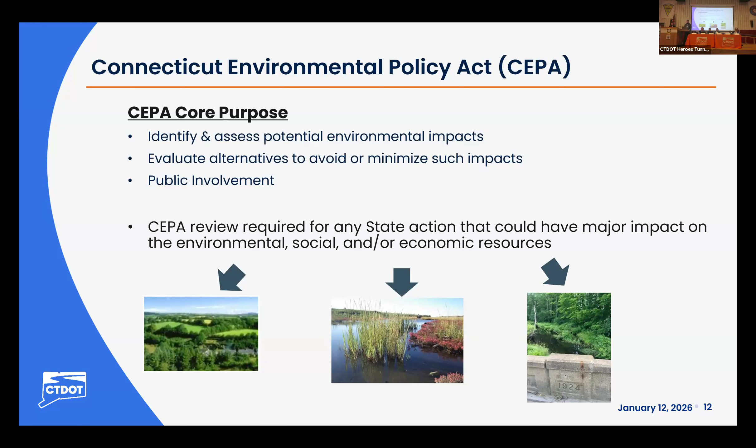Actually, for this project, because it involves federal funding through the Federal Highway Administration, we also have to ensure compliance with the National Environmental Policy Act, or NEPA, as well.

So that's obviously just a really brief general idea of what CEPA is and what resources we need to consider under CEPA. So I'll just describe what is meant by the term scoping. Under CEPA, scoping has a really specific definition, and the process involves a defined set of steps for public outreach. CEPA scoping is defined as the gathering and analysis of information that a state agency will use to establish the extent of environmental review of a proposed state action.

So basically, it's really a way for us to get information from the public and other state agencies, so we can determine the proper level of environmental review and documentation needed for a project. This allows us to make informed decisions that actually consider the environment. That process begins when we publish a notice of the project in what's called the Environmental Monitor, which kicks off a minimum 30-day public comment period.

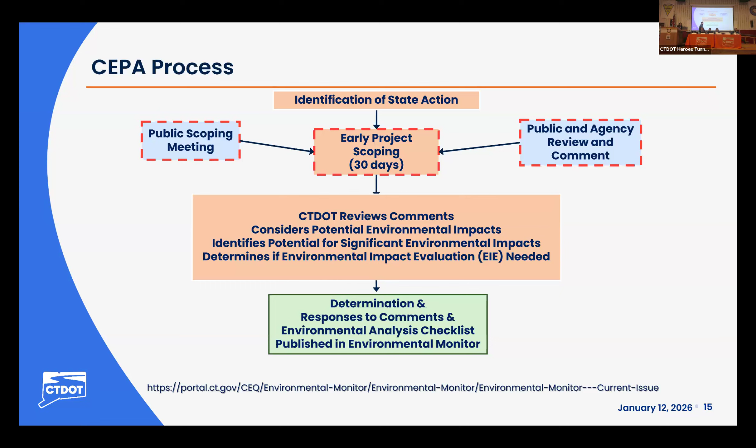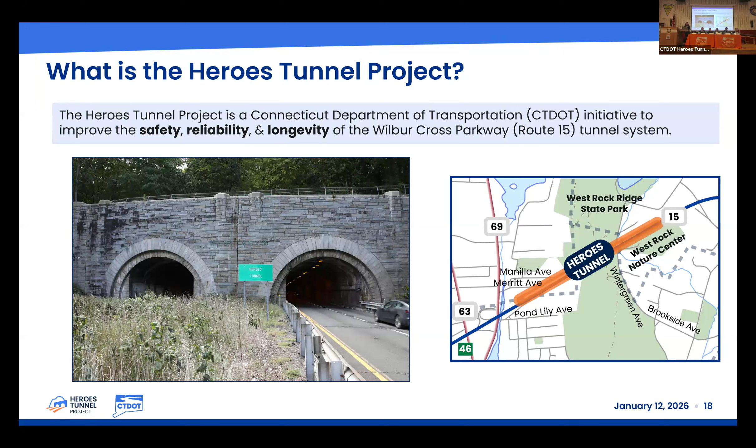The Heroes Tunnel project is a CTDOT initiative to improve the safety, reliability, and longevity of the Wilbur-Cross Parkway Route 15 tunnel system. At the last public information meetings held in 2021, we presented an option that would essentially replace the tunnels, creating two bigger barrels and adding a third barrel. However, there are many environmental resources in the park on top of the tunnel that would be significantly impacted by drilling to widen the tunnels and add a third barrel. So after the 2021 meetings, we went back and looked at rehabilitation and replacement options again, to ensure we were recommending an option that addresses the needs of the Wilbur-Cross Parkway tunnel system and maximizes safety while minimizing impacts to the traveling public and resources in the vicinity.

The purpose of the project is to correct existing deficiencies, including structural, highway, electrical, and mechanical elements, as well as traffic congestion, enhance safety, improve travel, and ease future maintenance of the Heroes Tunnel.

Some of the needs: the existing tunnel has extensive deterioration. There are annual inspections performed, and there's extensive cracking, loose or spalled concrete, and areas where reinforcement is exposed and corroding. Also, the ventilation system is non-functional, and the electrical system needs rehabilitation to ensure lights remain reliable and functional. With this deterioration, CTDOT's maintenance forces are frequently going out to the tunnel, removing and patching concrete, and doing other repairs. One goal of the project is to minimize the need for future maintenance and extend the service life of the tunnel another 25 years at a minimum.

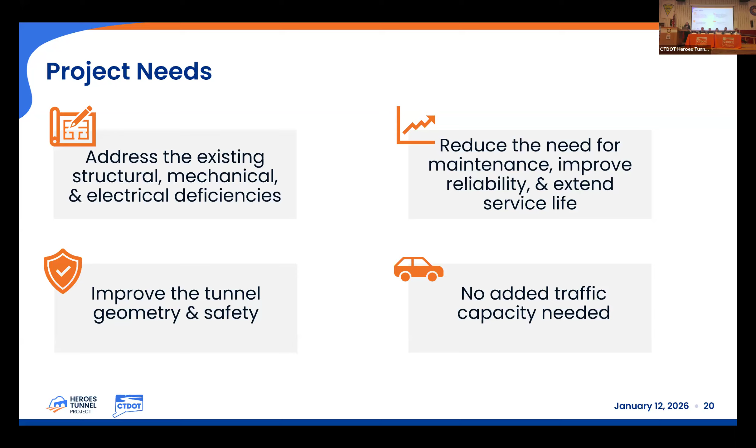So considering the purpose and the project needs, the proposed scope includes tunnel liner rehabilitation, to address the cracking, spalling, and loose concrete typically found in the tunnel, and to reduce the need for frequent maintenance repairs. In addition, we're proposing life safety and fire protection upgrades, which will address the non-functional ventilation system and ensure that emergency responders can get there and respond in a fire or other emergency.

Lastly, full replacement is not being pursued any further, so we're no longer looking at the option that added a third barrel. As you know, considering that there's no need for additional traffic capacity, and that the primary focus is to increase safety and address the deterioration, we're not pursuing that full replacement option.

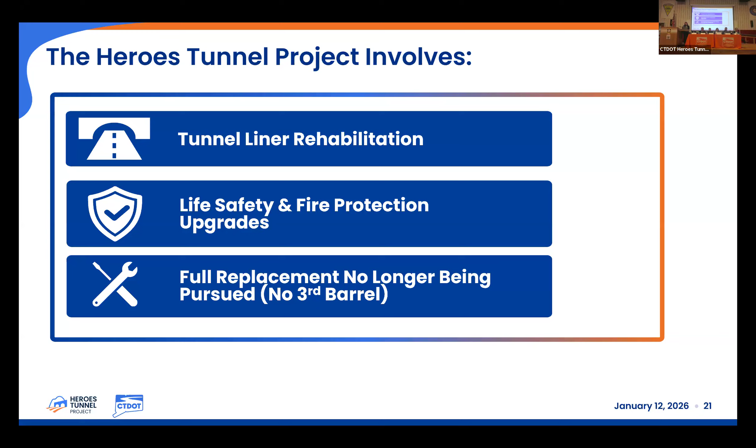The Heroes Tunnel carries Route 15 northbound and southbound under the West Rock Ridge State Park in New Haven, Woodbridge, and Hamden. The West Rock Ridge State Park is an important resource in Connecticut for both recreational and environmental reasons, so potential impacts to the park were carefully evaluated when considering tunnel rehabilitation alternatives. The recommendations proposed under this project were selected to minimize impacts as much as possible.

The limits of State Project 92-689, the Exit 46 interchange project, are located just south of the tunnel. We're working closely with that project team to coordinate construction activities and make sure there are no conflicts between the two projects.

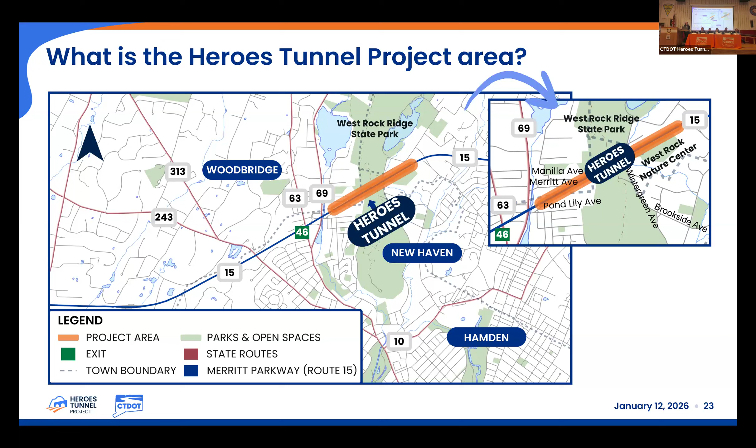As it stands today, the Heroes Tunnel conveys two 11.5-foot wide travel lanes and 28-inch wide walkways in both barrels. Inspections are performed annually, and the tunnel is considered to be in poor condition based on the condition of the tunnel liner. Approximately 74,000 vehicles drive through the tunnel each day, and in 2024 there were 30 accidents reported within the tunnel. Fortunately, none were fatal.

Highway geometry improvements within the tunnel and at the Exit 46 interchange are proposed to improve safety and reduce the number of accidents. The tunnel is approximately 1,200 feet long. Since it's over 1,000 feet long, we need to consider ventilation needs for both congested traffic and fire emergency scenarios, using the National Fire Protection Association, or NFPA 502 code, as a guide.

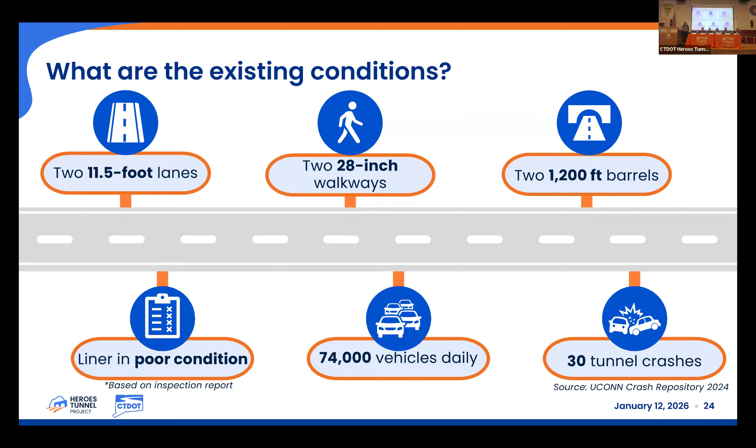Per NFPA 502, which has been adopted in the Connecticut State Fire Code for new tunnels and is being used on this project as a guide for the tunnel rehabilitation, an Authority Having Jurisdiction, or AHJ, should be designated for the tunnel. For this project, the AHJ is the State Fire Marshal, who is responsible for ensuring that all design, operation, and maintenance activities for the Heroes Tunnel comply with applicable codes, standards, safety regulations, and emergency response needs.

We've had several workshops over the past year with the State Fire Marshal and emergency responders in New Haven, Woodbridge, and Hamden, as well as state agencies, where they've shared their operational needs and provided feedback on the proposed fire protection and life safety improvements. We will continue to coordinate with them throughout the design phase to review the design plans and develop a post-construction emergency response plan.

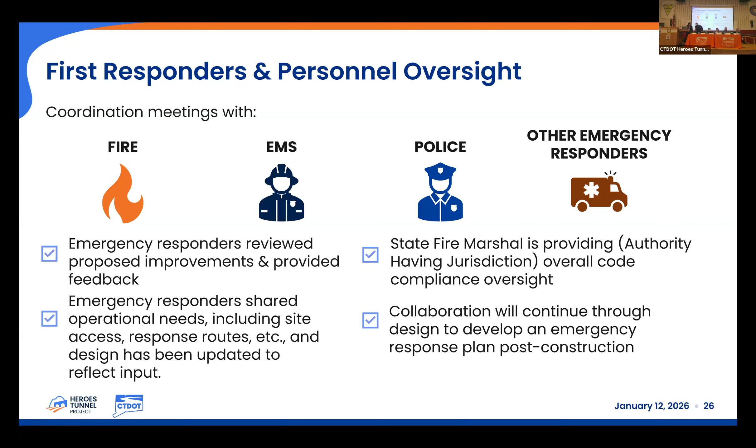Well, thank you, Tracy.

Recommendations. So what are we looking to do as far as the tunnel is concerned? Well, first off is our life safety and fire protection recommendations. These are all based on the National Fire Protection Association NFPA 502 requirements for ventilation, emergency detection systems, electrical systems, traffic control, and fire protection upgrades.

The recommended improvements include incident command post staging areas at the north and south approaches to the tunnel. This allows first responders to stage and evaluate responses to an incident within the tunnel. We'll also have new fire hydrants placed at those incident command staging areas, providing a water source for first responders.

We'll also be proposing a new fire detection system. What we're proposing is a fiber optic linear heat detection system verified by a monitored CCTV camera system, overseen by those operating the tunnel and overseeing tunnel operations.

Another thing we're proposing is radio frequency boosters. Those will boost the signals for both emergency radios and cell phones within the tunnel, so if there's an incident, you have your cell phone and can actually call 911.

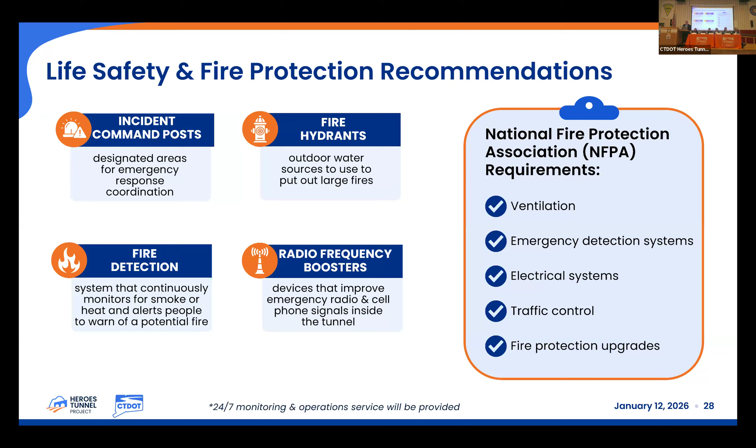Our ventilation requirements - again, as Tracy said, the presently existing ventilation no longer works within the tunnel. Ventilation fans will be provided for both emissions control, that's normal operation ventilation, and the dissipation of smoke during an incident, which is emergency operations ventilation.

Emission sensors will monitor the vehicle emissions, and the fire detection systems will monitor for fire and smoke during an incident. What we're proposing is 8 pairs of longitudinal jet fans per barrel, placed above the traffic envelope.

A little later in the slides, we'll show you a cross-section of what that actually looks like. Modifications are recommended to the tunnel liners at those support locations so we can modify the tunnels to be able to support those fans.

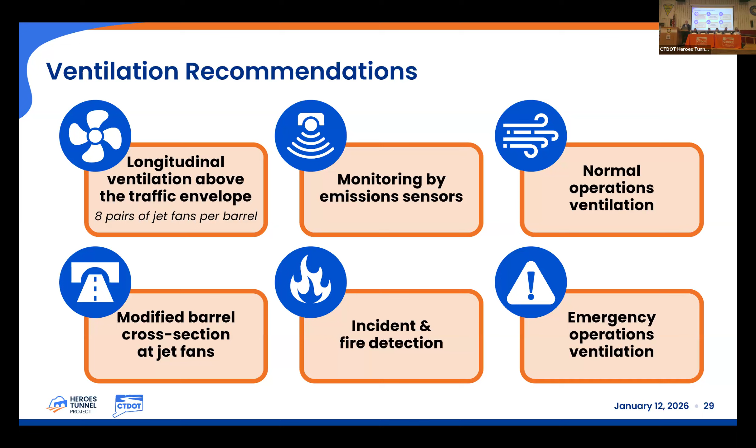For our traffic control recommendations, traffic control is required to improve safety and manage traffic flow during an incident. The proposed new traffic control systems include new portal traffic signals, which will be able to close the portals during an incident, shutting down both portals as needed.

We'll also be having lane control signals. Those will be able to close lanes during small or non-emergency incidents.

Dynamic signs or variable message signs, VMS signs, will also be utilized. That will notify traffic in advance of incidents, maintenance, construction, or inspection work happening within the tunnel. So you'll be notified in advance if there's an issue, an incident, or inspection or construction work going on.

We'll also have upstream warning signs. These will indicate that the traffic systems just described will be in play as you approach the tunnel, so basically, pay attention to them.

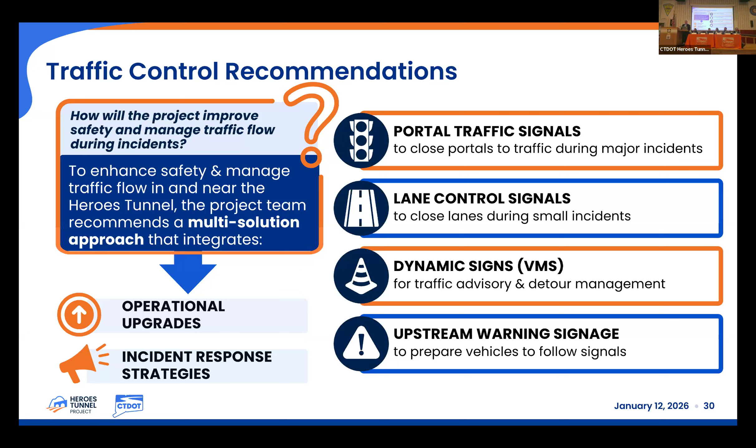One of the things we're looking at, and we have a board for the audience, is the crossovers. There are existing crossovers at both the north and south approaches in the median, used to divert traffic into a single barrel during inspection and maintenance operations. The existing geometry only handles a 15-mile-an-hour design speed because they're so tight, which slows traffic during these operations or during construction.

The proposal will increase the opening to allow a 40-mile-an-hour design speed, creating more efficient traffic flow, especially during construction. This will be critical for the construction phase, and their continued use post-construction will be evaluated as we move on in the design.

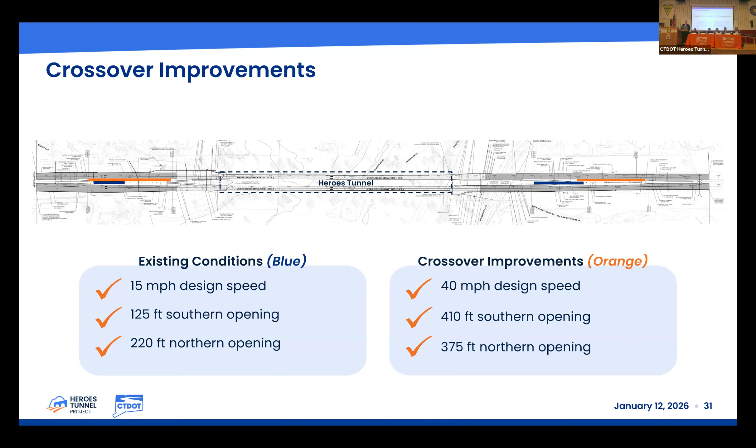For our maintenance protection of traffic during construction, construction will be limited to off-peak hours. We'll have 2 operational lanes during construction, within one tunnel, with bi-directional traffic in the barrel not being worked on, utilizing the improved crossovers for the higher 40-mile design speed at the approaches.

As far as off-peak hours, we're looking at nights from 10 p.m. to 6 a.m. We will note, though, as the design progresses, some daytime work may be required to complete more challenging construction tasks. We're monitoring the construction operations we're proposing, but if daytime work is needed, this will be coordinated with the required municipalities as we move forward.

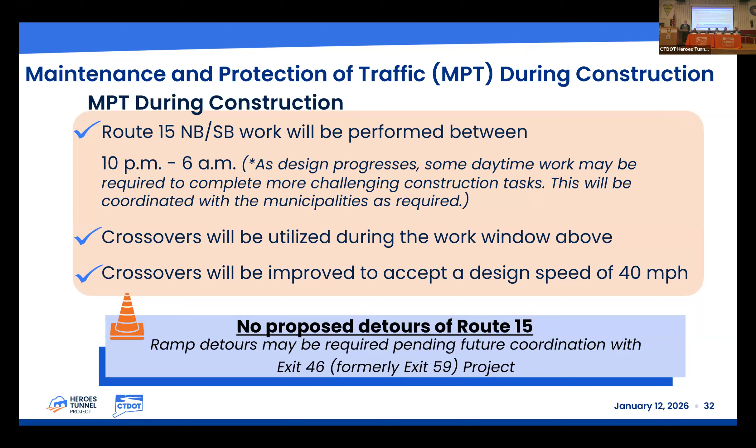One thing we want to stress: no detours of Route 15 are proposed. Though ramp detours may be required during the construction phase.

Now, egress and wayfinding recommendations. Safe evacuation from the tunnel during an incident is a critical aspect of life safety and fire protection design of the tunnel. To facilitate that, an additional egress pathway at the midpoint of the tunnel is being proposed.

We're going to be converting the existing central control room to an egress cross passage and tunnel ancillary equipment room. This allows evacuees to egress from the incident barrel to the non-incident barrel. If there's a fire or incident in one barrel, you can actually go to the other barrel without having to go out one of the portals.

The tunnel will also include active emergency signage and wayfinding lighting. All electrical systems will be protected from fire and have a 2-hour fire rating, so our emergency systems will be fire rated to function during the incident they're designed to protect you from. Evacuee signage will be provided throughout the tunnel.

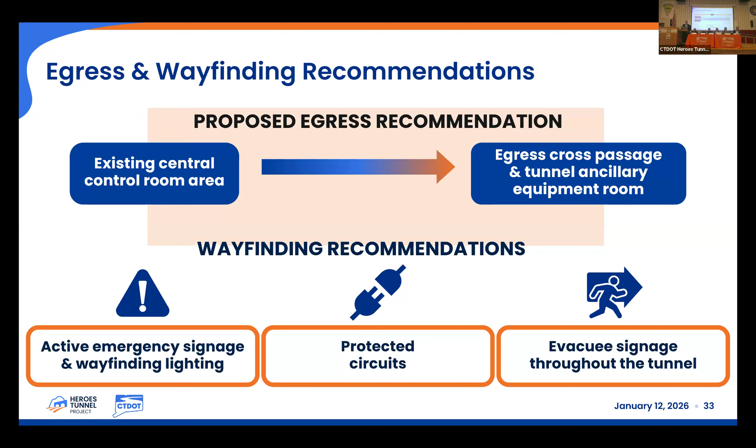Presently, the only way to egress during an incident is out the southern or northern portals. By creating an egress passageway at the center of the tunnel to evacuate from the incident to the non-incident barrel, that reduces the length you have to travel during an incident. If there's an incident, you don't have to go all the way back to a portal. You don't want to go past the fire, so you go through the egress cross passage into the non-incident barrel. Because of the traffic control we're proposing, all traffic will be stopped not only in the incident barrel but also in the non-incident barrel.

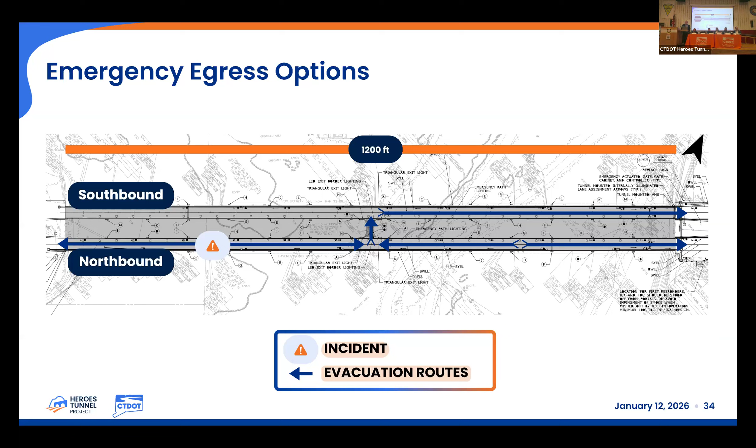We'll have dual doors, and these doors are fireproof doors. They will swing in the direction of egress. So if you're in this barrel, egressing to the non-incident barrel, the doors swing that way. There's a gap in the barrier you come through, and the doors swing in the direction of pedestrian traffic into the non-incident barrel.

So what we're going to do is positively pressurize this space, providing fresh air from the top of the ridge. We're going to run ducts down, reusing these central shafts to provide positive pressurization and fresh air, so you're not drawing air from either barrel, and especially not dealing with smoke during an incident. This prevents any smoke from the incident barrel reaching the non-incident barrel.

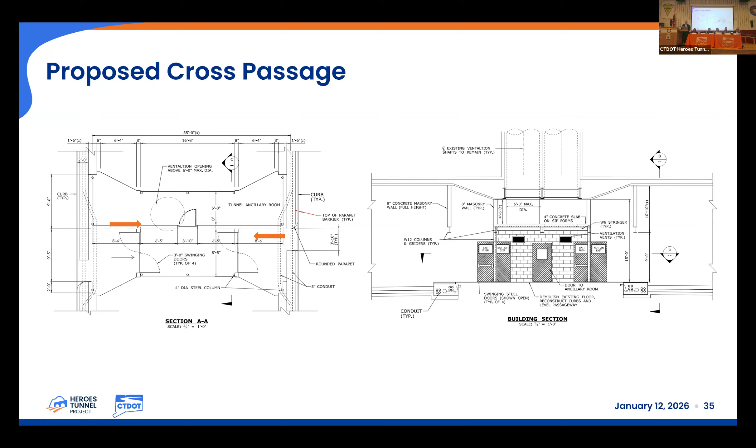Electrical systems and illumination considerations. One of the big aspects we're looking at is the upgraded electrical distribution systems. We have to power a lot of the new life safety and fire protection systems, and these systems have definitely increased the electrical loads required to power them.

We'll also have one utility service entrance feeding into the tunnel ancillary building, which will be placed at a portion of the District 3 maintenance facility location. We will also have an emergency diesel powered generator to power all emergency electrical loads, so if there's a power outage, you still have an emergency generator. That generator will be sized to power all of the emergency systems, emergency lighting, emergency ventilation, and everything else.

All life safety and fire protection conduits will be embedded in the concrete or have a 2-hour fire rating. We'll show you the proposed cross-section with all the conduits for both electrical systems and communication that we're going to require for the new tunnel.

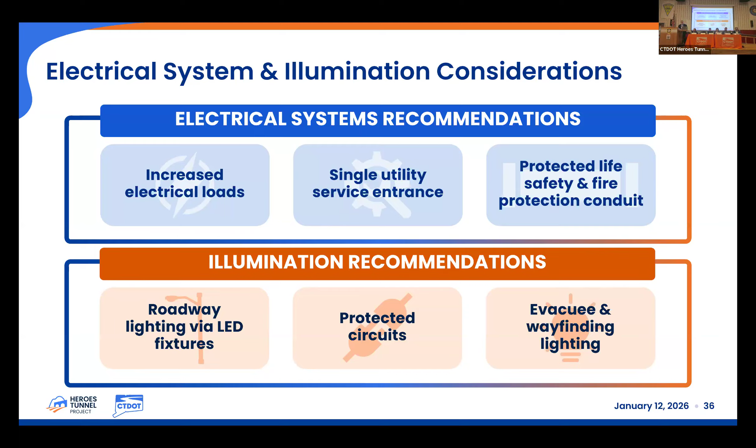So what are some of the other tunnel improvements? First, as Tracy mentioned, we will be addressing the tunnel liner rehabilitation, which includes removal and replacement of all deteriorated concrete with high performance concrete. That also includes corrosion inhibitors to extend the service life.

The vertical clearance envelope will be maximized to accommodate the new jet fans by lowering the roadway profile with a new full depth roadway repavement. The existing roadway hasn't been replaced since the tunnel was constructed, so when we replace it, we're lowering the roadway as much as possible to maximize the vertical clearance from the roadway surface to the new jet fans.

Lanes will be widened to 12 feet. As I mentioned earlier, we'll be providing new fire hydrants at the incident command staging areas. We're providing new fiber optic linear heat detection systems verified by the CCTV camera system, and we're providing new ventilation fans.

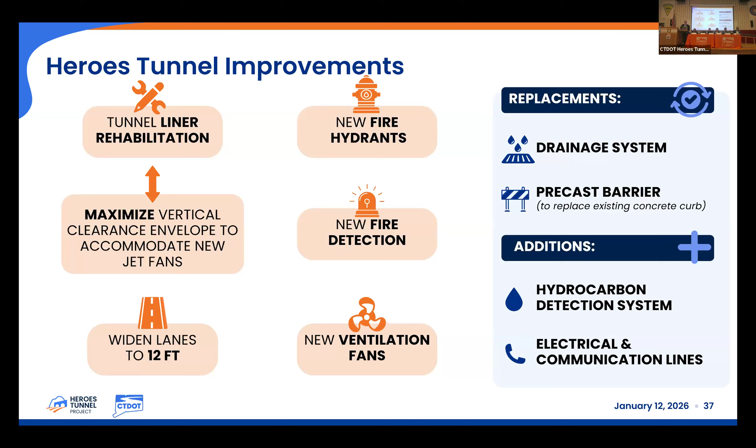We'll also be replacing the existing drainage system with a non-combustible drainage system as per NFPA 502 requirements, so that it's not going to contribute fuel in case of any flammable liquid spills. The existing concrete curbs will also be replaced with precast concrete barriers. We'll also have a new hydrocarbon detection system within that new drainage system to detect flammable liquid spills, and new electrical and communication conduits as well.

We're also looking at the installation of a lot of our fire protection systems presently proposed on the walls - sensors, junction boxes, standpipes, or whatever other fire protection equipment we're proposing to bring into final design - and the new lighting system. And here again are those ventilation fans placed above the traffic envelope, with a modified cross-section that handles the support locations for both.

Note that the vertical clearance envelope is reduced a little bit from the existing, but we're looking at options and evaluating them both now and in the final design phase to try to increase that vertical clearance envelope as much as possible - things like some of the support locations and everything else.

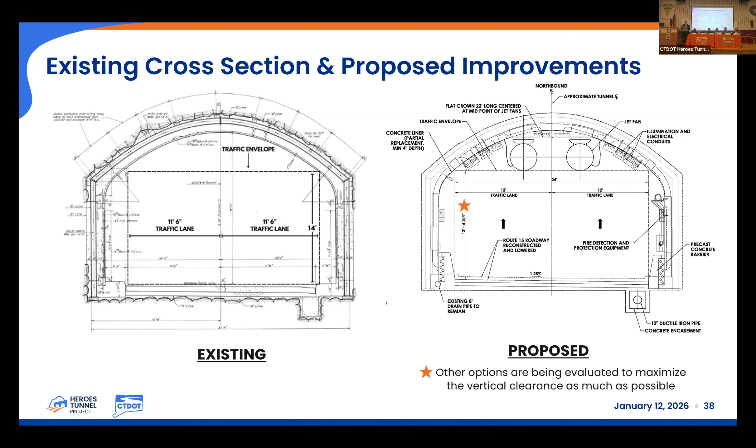And the hydrodynamic separator - this is going to be part of the new drainage system. What it does is capture spilled liquids while allowing water in the drainage system to continue to flow. We'll also have a hydrocarbon detection system that notifies those overseeing tunnel operations of an active spill including flammable liquids. Essentially, the drainage system is designed within the tunnel so that you can separate out any spills, get rid of that, and know where those are so you can control that going forward.

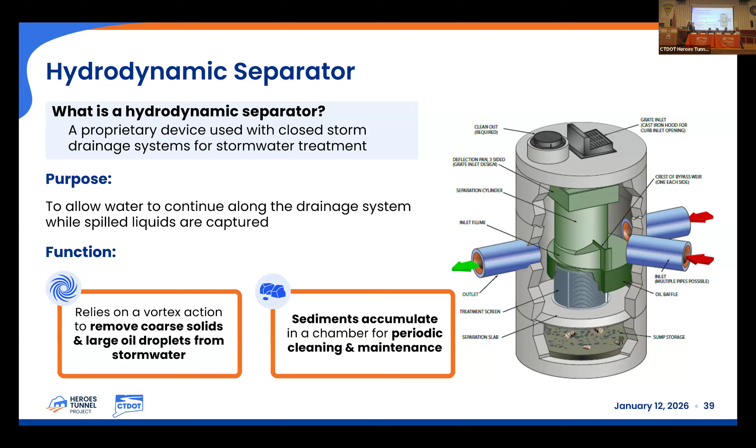Mike already covered the proposed work on the tunnel liner. We're proposing to replace the surface concrete to a depth of 4 inches at a minimum in both tunnel barrels. And then full depth reconstruction is proposed on the tunnel liner at the areas where the jet fans are to be anchored to the ceiling.

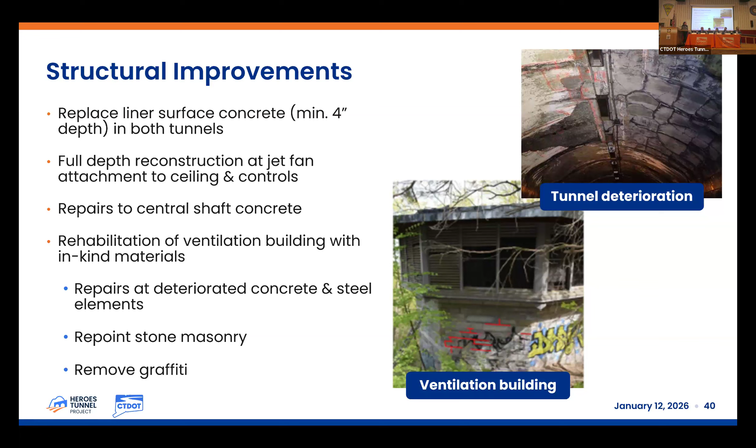There are 2 bridges within the project limits, bridges 774A and 774B. They carry Route 15 over Wintergreen Avenue. And we're proposing to do preservation work on these 2 bridges as part of the project.

That work includes concrete deck patching, new waterproofing membrane, and a new bituminous overlay, bridge repairs, bridge rail repairs and upgrades, concrete repairs on the underside of the arch, and any other miscellaneous repairs.

To perform the work on the top of deck, we're anticipating temporary off-peak lane closures on Route 15. We also anticipate a need for a lane closure on Wintergreen Avenue with an alternating one-way traffic pattern in order to perform repairs on the underside of the arches.

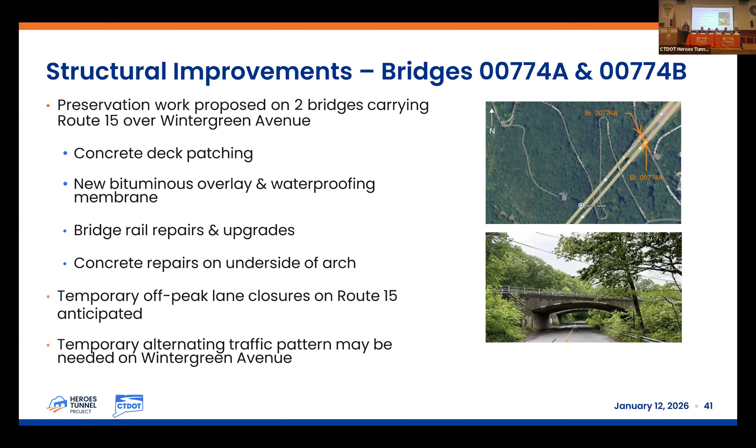Most of the work proposed under this project can be performed within the existing highway right-of-way, but there are a few right-of-way impacts that we are anticipating.

For one, there is a temporary construction access road proposed on top of the ridge on Connecticut DEEP property, and we'll need a temporary construction easement to build that. This access road is proposed to go from Baldwin Drive to the ventilation building and will provide a path for construction equipment to get up there, deliver materials, and perform the repairs.

Also on those two properties, we're proposing permanent drainage rights of way. This allows us to install new catch basins and also maintain them in the future. We have another drainage right of way proposed on CT DEEP property at the southwest corner of the tunnel, again to install a new catch basin and maintain it in the future.

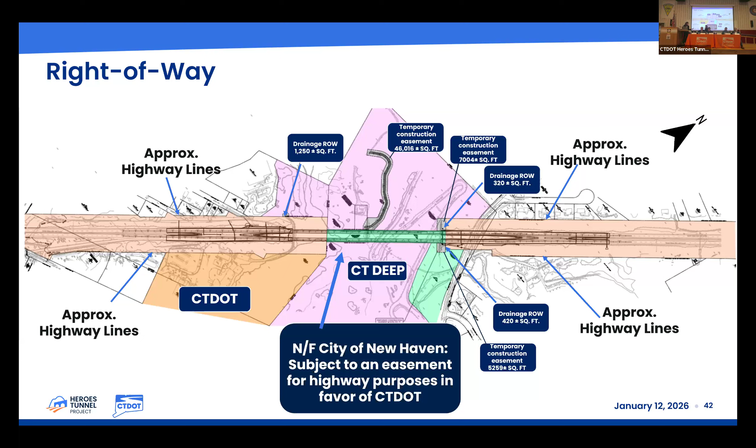Thank you, Tracy. My name is Kathleen Erickson, and I'm a project coordinator with the department's Division of Rights of Way. Our office is responsible for acquiring property rights needed for transportation projects all throughout the state. I'll be giving you a brief overview of what the acquisition process looks like.

Before I get further into that, I want to mention that the property impacts for this project are still being finalized, so that could change as the design progresses. Also, any property rights acquired are done so in accordance with Connecticut General Statutes, Sections 13A-73 and 13A-98E, as well as the Uniform Act.

Next, our office will determine the fair market value of those property rights, which will be used to create an offer of just compensation. The property owner will receive the offer in writing, and a right-of-way agent will be available to meet with them to discuss the project, their specific property impacts, and the offer itself.

The property owner will have a reasonable amount of time to consider the state's offer and to enter into negotiations, and then once an agreement has been reached, the department will prepare all the necessary documentation in order to record the deed and the property map on the town land records.

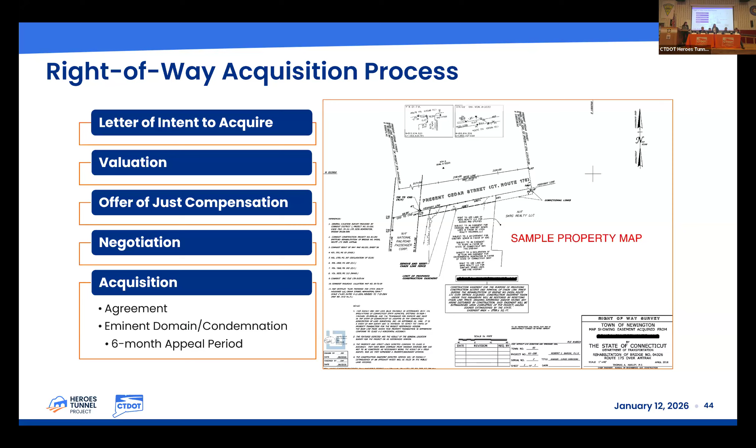As we've mentioned throughout the presentation today, there are significant environmental resources within the project limits. Section 4F coordination is needed due to the anticipated temporary impacts to the West Rock Ridge Park during construction, including that temporary access road, and the use of Baldwin Drive periodically to get construction equipment up to the access road and the ventilation building.

Section 106 processing is also required because, as Kevin mentioned, the Heroes Tunnel is eligible for the National Register of Historic Places, and also portions of the West Rock Ridge has been identified as archaeologically sensitive. The field archaeological surveys have been performed already, and a supplemental field survey is anticipated to be done this summer 2026, to see if any artifacts are found.

It's the department's intent to advance a programmatic agreement to advance the Section 106 so we can continue with the final design while we wait for the archaeological survey to be completed.

No impacts to wetlands or watercourses are anticipated with this project. However, we do anticipate that we'll need to prepare a stormwater general permit and also do a flood management certification.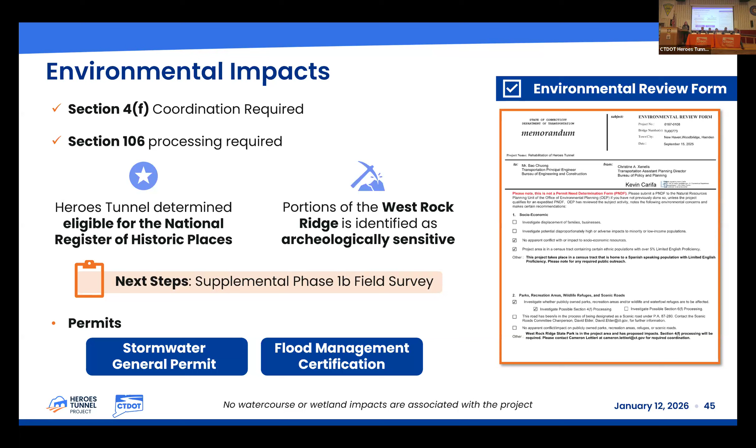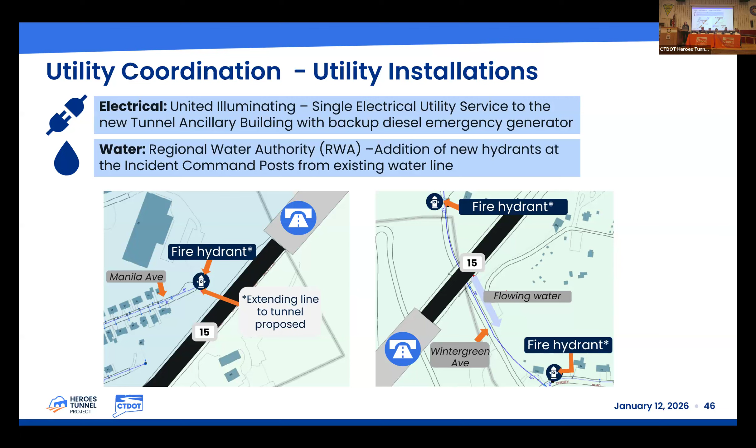As for utility impacts, we're working with United Illuminating to provide electrical service to the new tunnel ancillary building that's proposed on the District 3 construction property. And then we're also working with the Regional Water Authority to provide a connection to the new proposed hydrants that are to be placed at the ends of the tunnel that will be used for emergency response in the future.

Right now, we're in the preliminary design phase of the project. Based on the current project schedule, assuming that we get all permit approvals in time and right-of-way acquisitions in time, we anticipate that construction will start in spring 2028 and then be completed by the end of 2030.

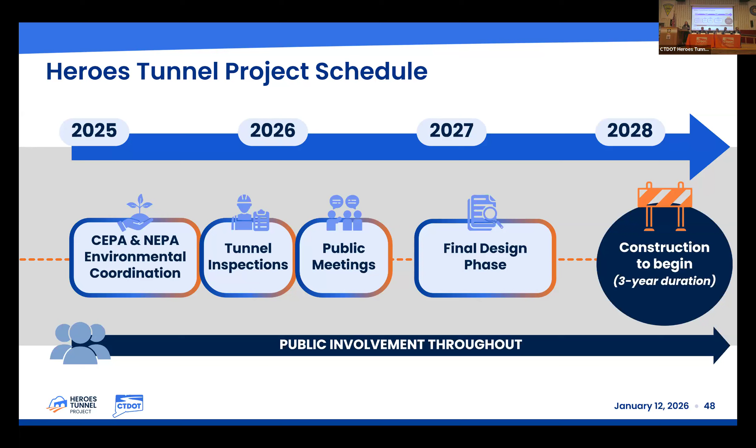Throughout this process, we will continue to keep the public involved. We'll have our website available and you can get periodic updates.

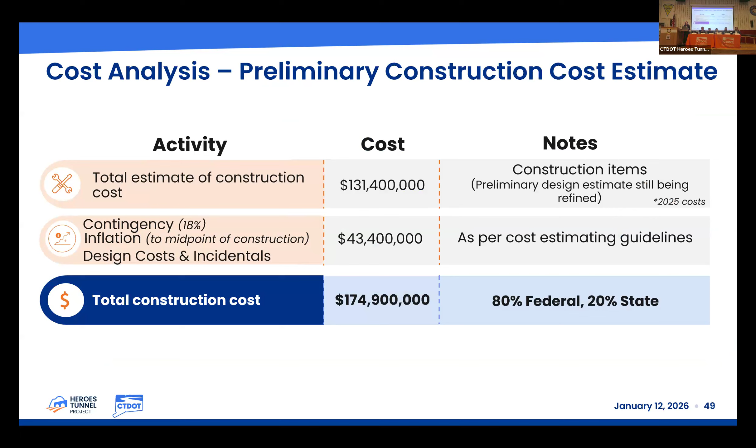The preliminary construction cost estimate at this time is $174.9 million. And we plan on using 80% federal funds and 20% state funds to cover that.

So the next steps for this project: the public comment period ends on January 28th. So again, we invite you to continue to send us comments and questions after this meeting. And then there's some other steps, but we're looking to complete the preliminary design phase by mid-February.

After that, we'll proceed into the final design phase with the anticipated completion of design in fall 2027. And again, at this time, we anticipate that construction will start in spring 2028.